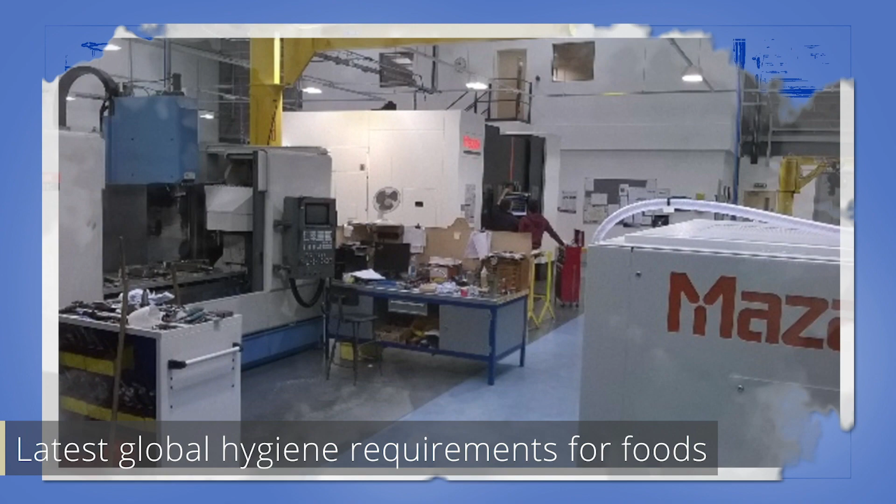The Sanitary Extruder Hood, or as we prefer to call it, the SEH, is used in the manufacture of small, dry, cereal-based foods produced continuously on a cooker extruder, commonly known as kibble. The new SEH has been designed by Frazer-Nash to meet the latest global hygiene requirements for foods and complies with the FDA guidelines and the European regulation for materials in contact with foods.

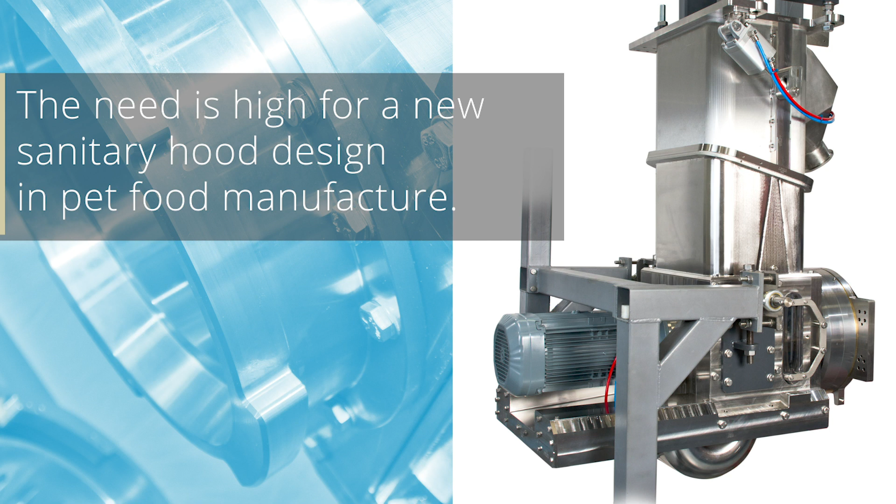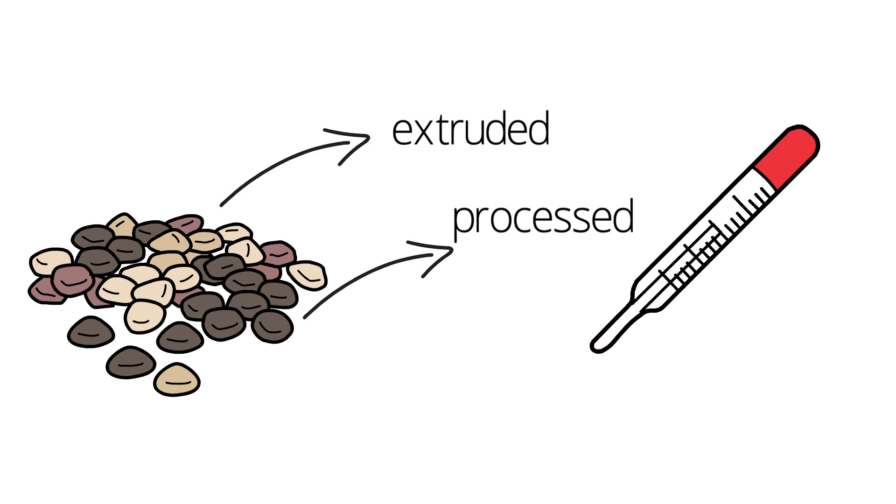The need is high for a new sanitary hood design in pet food manufacture. Despite publicity and recalls surrounding contaminated animal food, Salmonella continues to present a genuine threat to both humans and animals. Typically, pet foods are extruded or processed at high temperatures that are sufficient to reduce pathogenic bacteria. However, the possibility for post-extrusion contamination still exists.

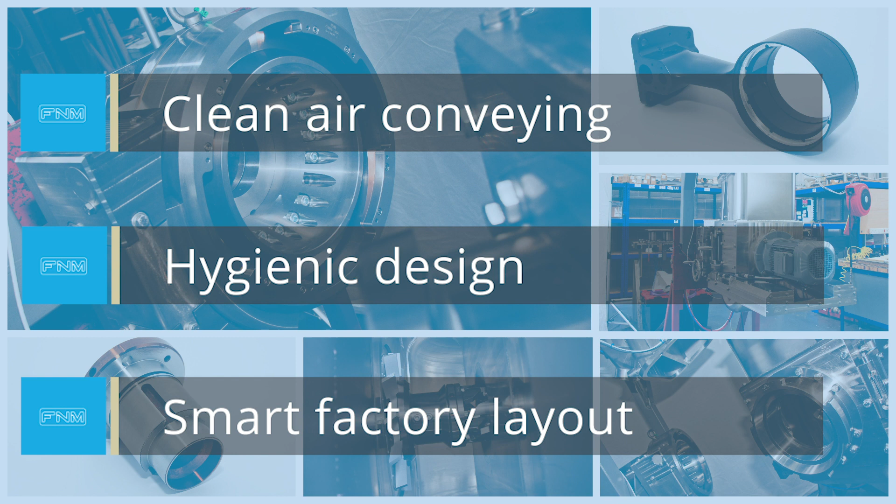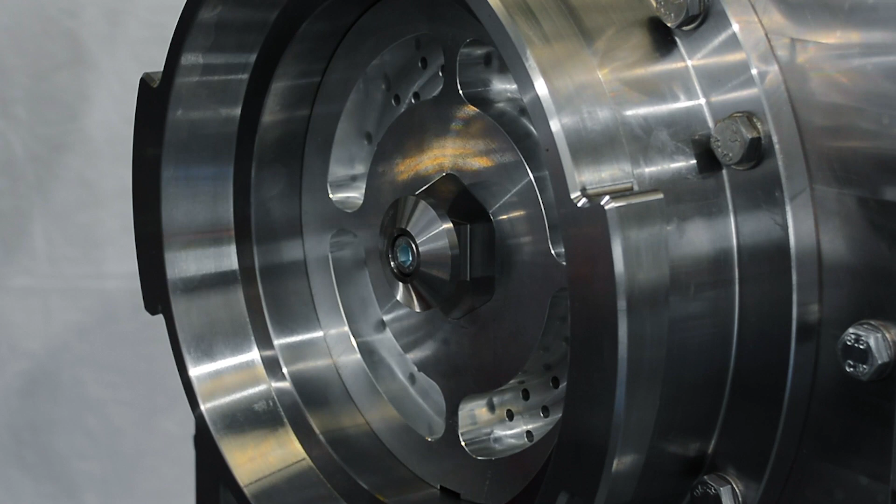Frazer-Nash have created the SEH to reduce these risks, using clean air conveying, hygienic design and smart factory layout, specifically at the post-extrusion stage of kibble production. The kibble process uses the client's cooker extruder to mix, cook and pressurize the kibble recipe so that it can be extruded through a die plate. As the food leaves the die plate, it is cut into small pieces via a rotary knife and carried away on a high-velocity clean airstream.

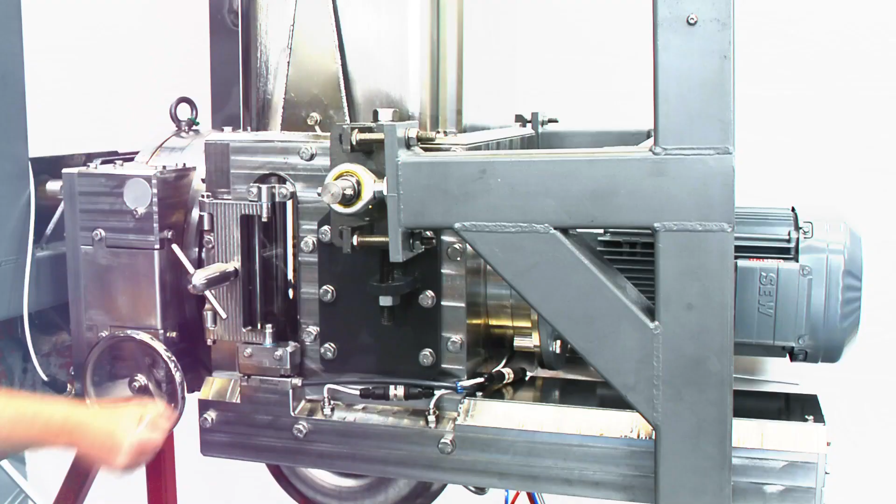The SEH is bolted to the end of our client's single or twin screw extruder and supports the die in an easily accessible chamber for cleaning and die change. Clean air is delivered under pressure into the cutting chamber and carries the cut food vertically upwards, allowing the soft product to flash excess moisture into the airstream without sticking together or deforming under its own weight. The food is discharged from a cyclone separator into a drying oven to reach final moisture content.

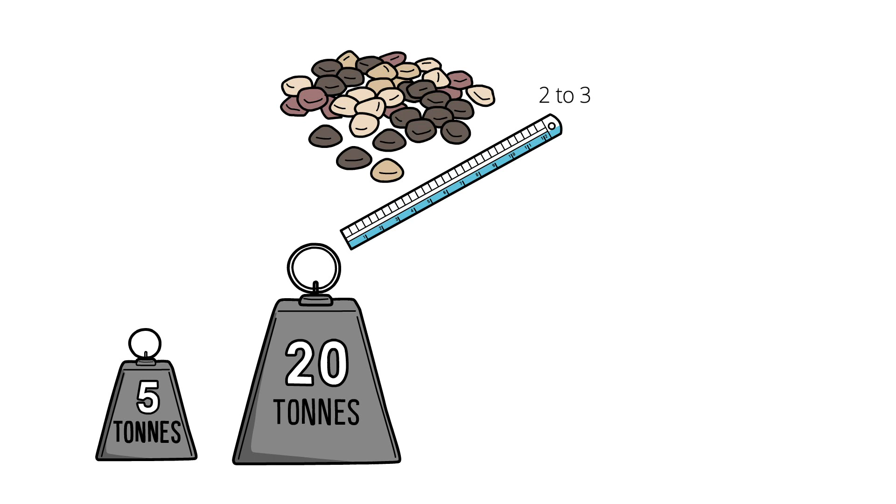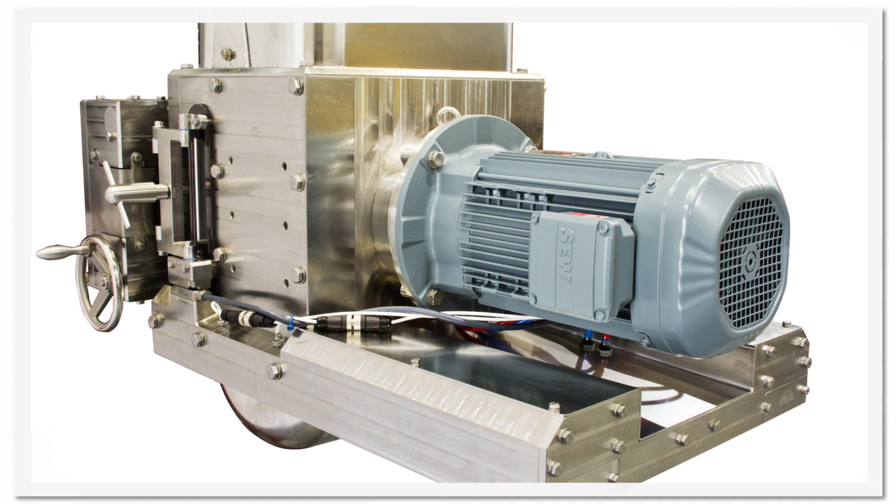The SEH has been designed to work with industrial outputs of 5 to 20 tonnes per hour. The food pieces can be produced in dimensions of between 2 to 35 mm in size and will expand as they leave the die due to steam flash-off from the product. The food can be formed in any two-dimensional shape via the die, and its length is controlled by the speed of the knife drive motor, which operates between 250 and 2,500 RPM.

The food is cooked under pressure from 25 to 70 bar, with a 15 to 22% moisture content. Following flash-off after the die and further drying, the final food moisture content will be reduced to around 5%. The SEH is designed to work at extruder pressures of up to 100 bar, which is safely higher than the normal extruder working pressure of around 40 bar.

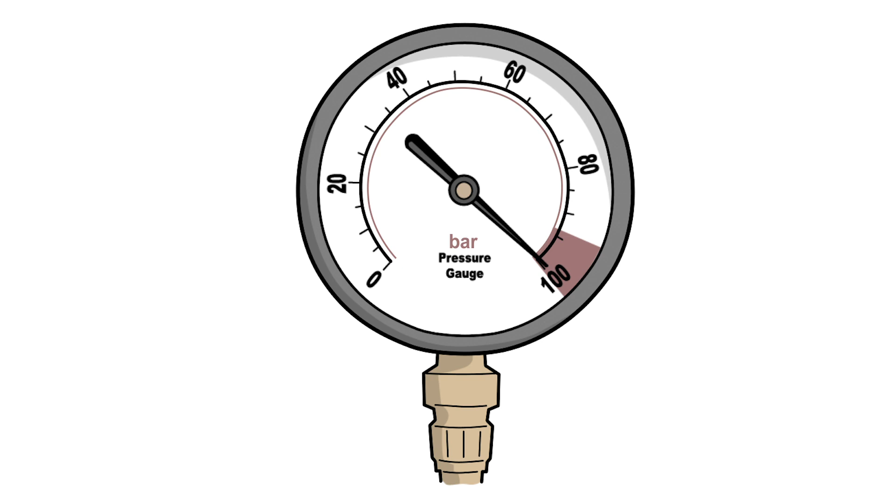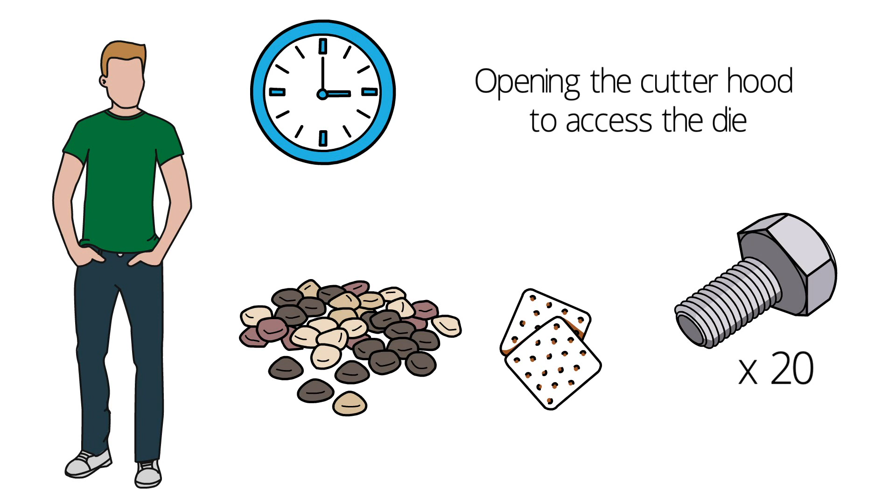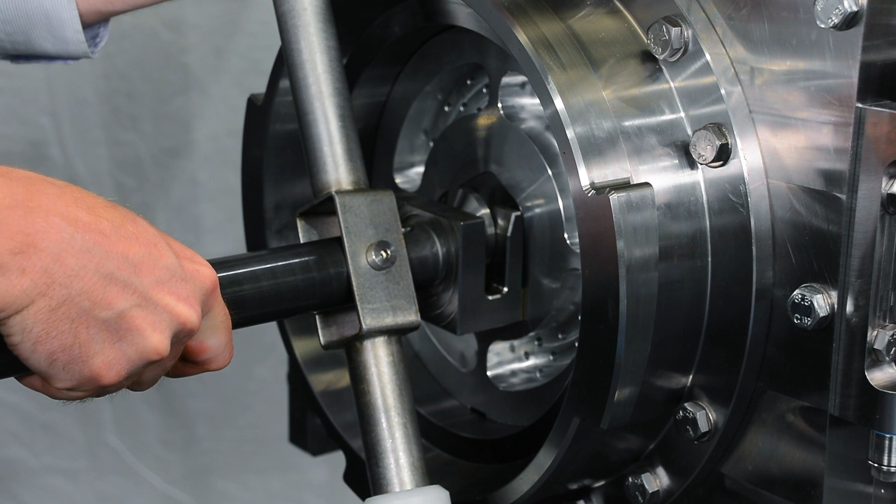Several times during the working day, our customers need to change the shape and type of food product they are making. Traditionally, this has been achieved by opening the cutter hood to access the die and then removing 20 high tensile bolts that secure the die to the extruder. The new SEH does away with this time-consuming process and the risk of bolt damage impairing the pressure rating of the extruder. Access to the die and cutter is via hinged opening, with a hand or motor-driven bayonet locking ring. No tools are required, and the bolts do not have to be regularly inspected and replaced due to damage.

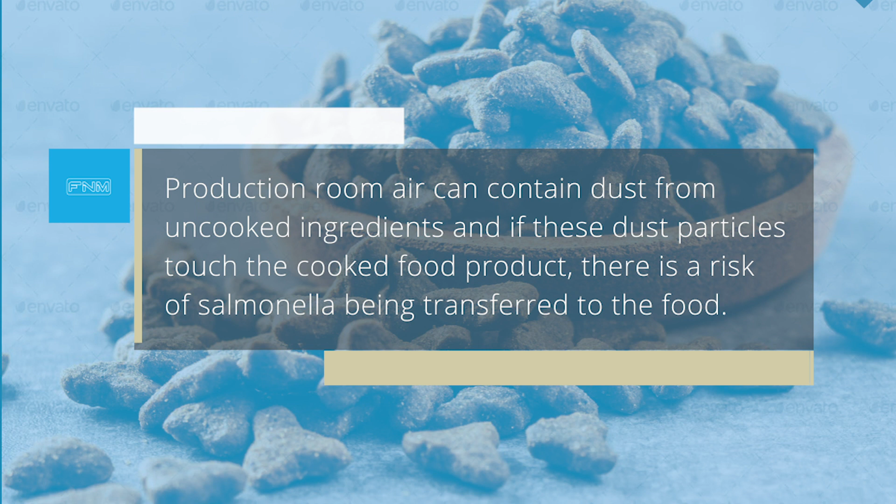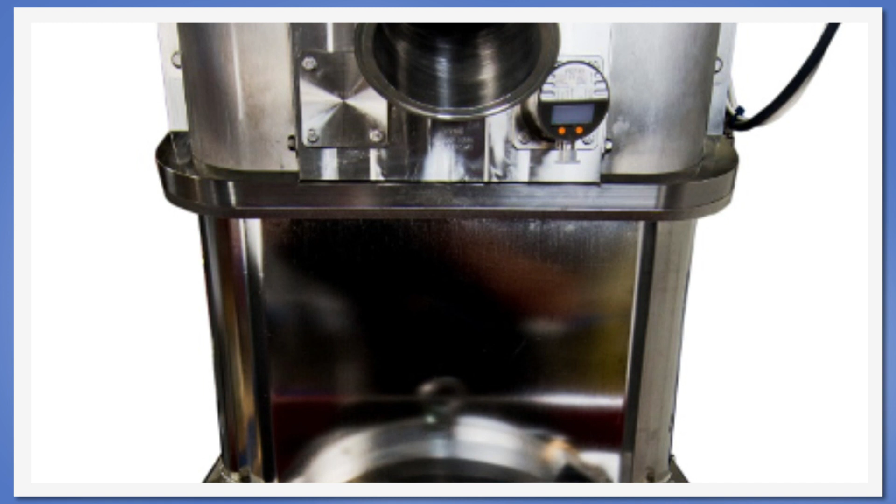Production room air can contain dust from uncooked ingredients, and if these dust particles touch the cooked food product, there is a risk of salmonella being transferred to the food. The SEH uses a fan to deliver clean, filtered air to the die cutting area at a pressure greater than the production room. Thus, there is no risk of contaminated air entering the pneumatic conveying system and soiling the finished cut product.

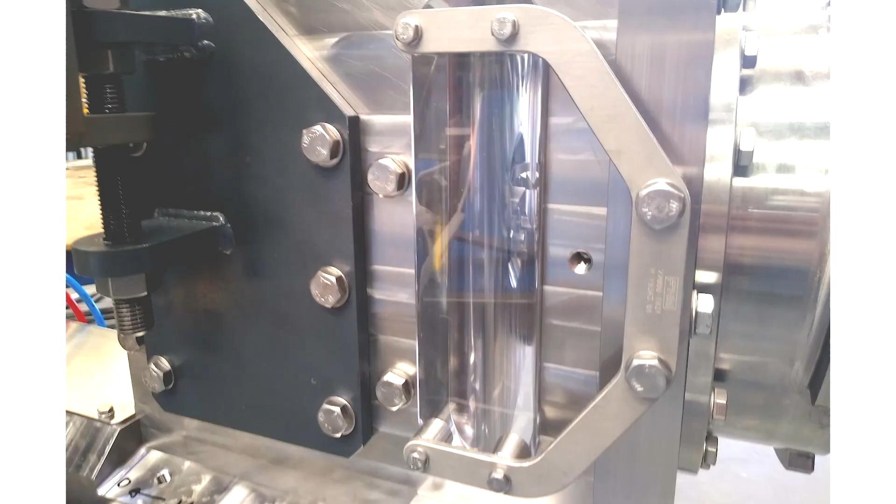The SEH is constructed from stainless steel, except for hardened items such as knife blades and die wear plates. It has no plastic or rubber parts exposed to the conveying air to reduce the risk of plastic contamination. The cutter shroud is fully machined for rigidity and dimensional accuracy to maximise cutter bearing longevity and minimise air losses through gaps, as there are no perishable seals present.

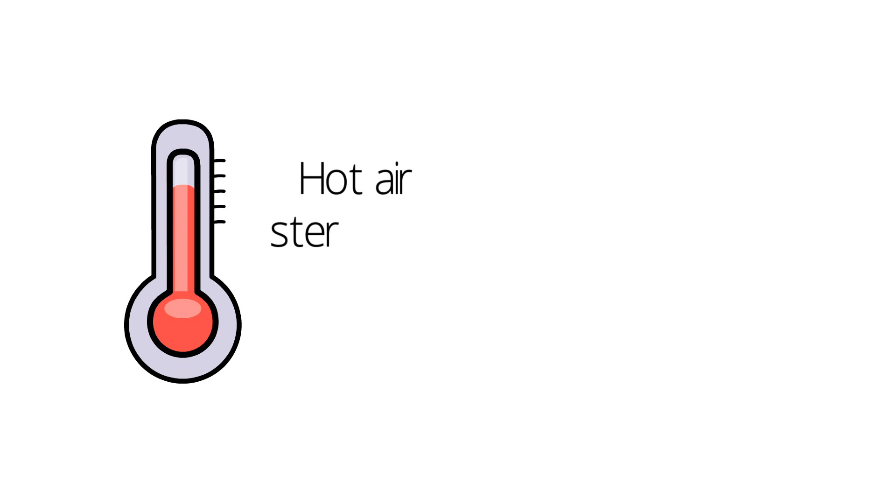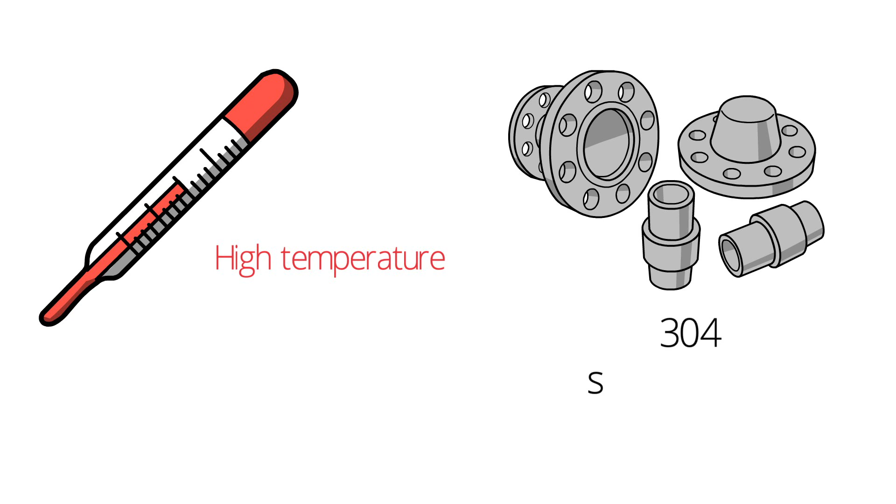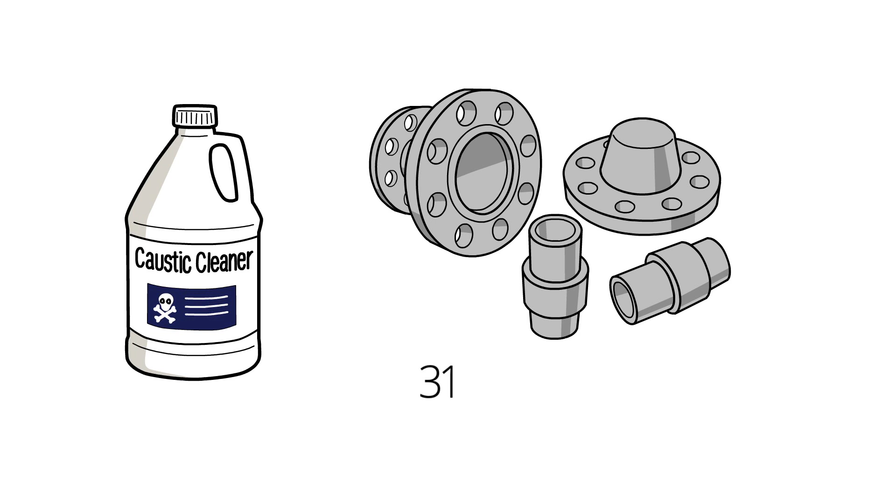We have two options for cleaning the SEH: hot air sterilisation and caustic cleaning. For hot air sterilisation, we can use 304 stainless steel construction. This process requires gas or electric heating in the clean air delivery system. For caustic cleaning and chemically aggressive food conditions, we use a 316 stainless construction. Minimal horizontal surfaces with smooth transitions on the internal ductwork minimise food traps and improve draining following cleaning.

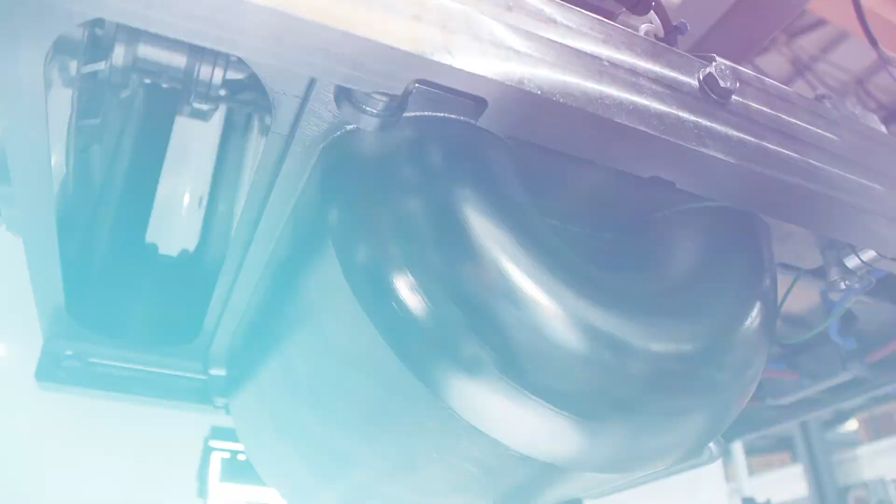On start-up and shutdown, product discharged from the extruder is not of the correct quality for consumption and has to be collected in mobile bins positioned under the die. To facilitate this, we have a pneumatically operated sliding valve to allow product to fall under gravity into the bin. To avoid spillage of conveying air and to ensure any good product in the ductwork is kept in motion, there is an air divert valve to allow the conveying air to bypass the die area.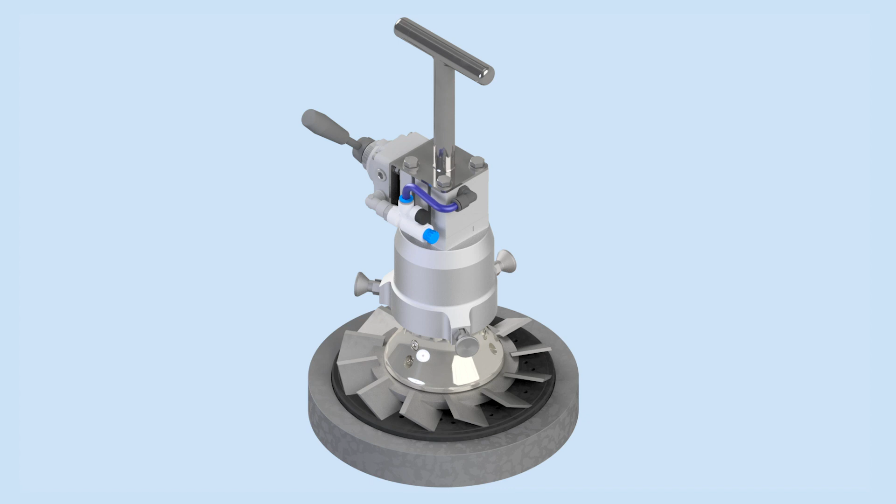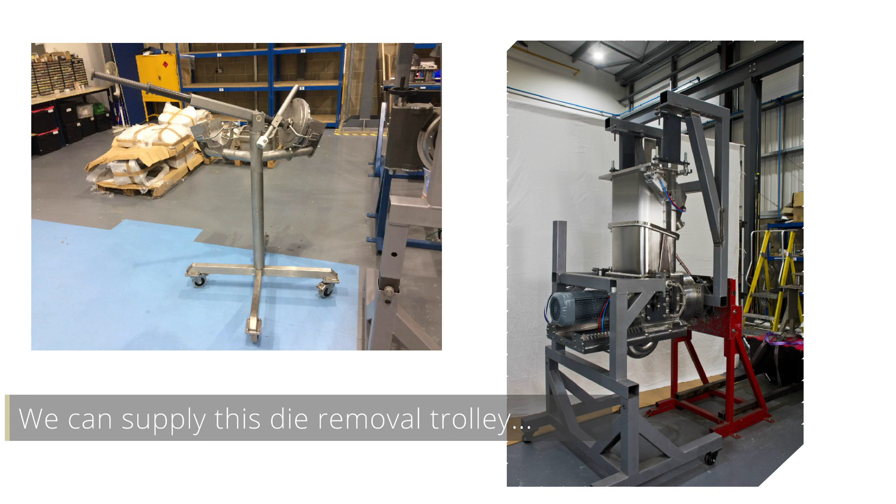Once production is underway, quality control needs to inspect the product being made on a regular basis. We have a pneumatically operated sample port at high level to catch a small sample of post-flash product without disturbing the pneumatic conveying line. To ensure the knife lasts as long as possible between maintenance schedules, Frazer-Nash can supply this pneumatically operated setup tool to preload the cutting disc against each die wear plate. Die stacks can become heavy, and if necessary we can supply this die removal trolley to support the weight of the die stack during die change.

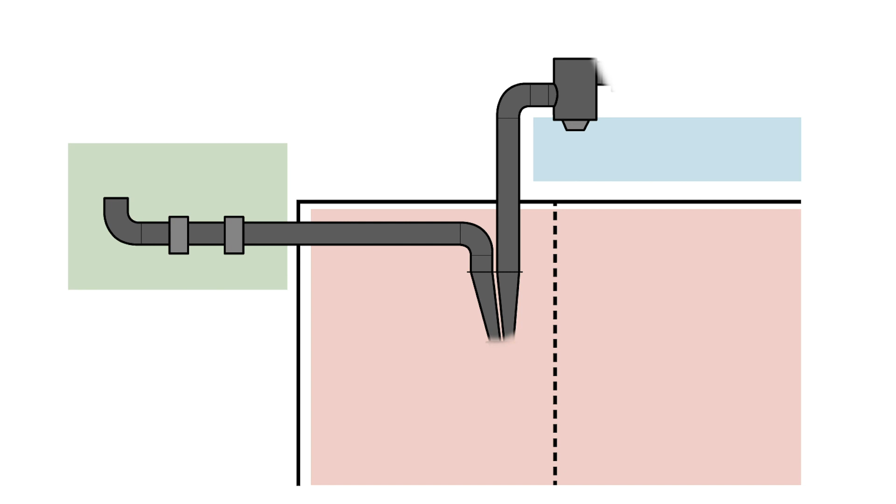Despite our best endeavours, it is always possible for product to block the pneumatic conveying line. To prevent damage to the SEH, we have a blockage detection sensor to shut down the extruder. This design is very flexible and can be adapted to suit a wide range of single and twin screw extruders. We can also adapt the die chamber to accommodate existing customer dies and knives. To complete the switch to our sanitary extruder hood, Frazer-Nash can specify and supply the air handling system, which includes fans, filters, separator and temperature and pressure control devices to ensure it functions at the highest possible hygiene standard.